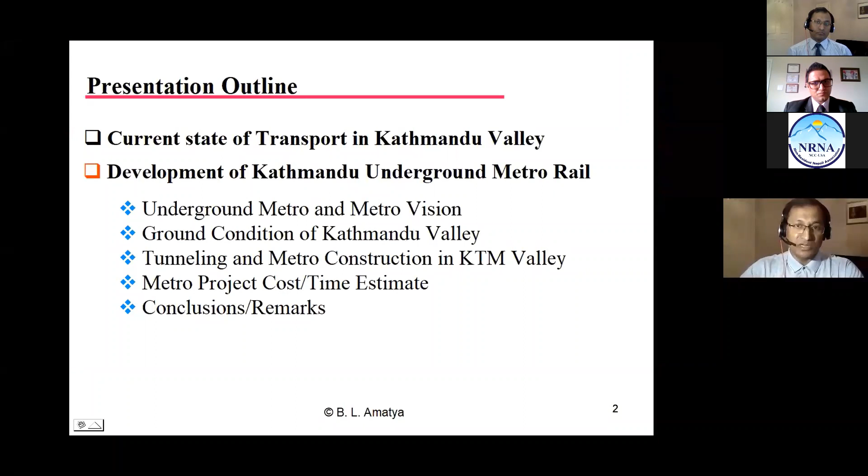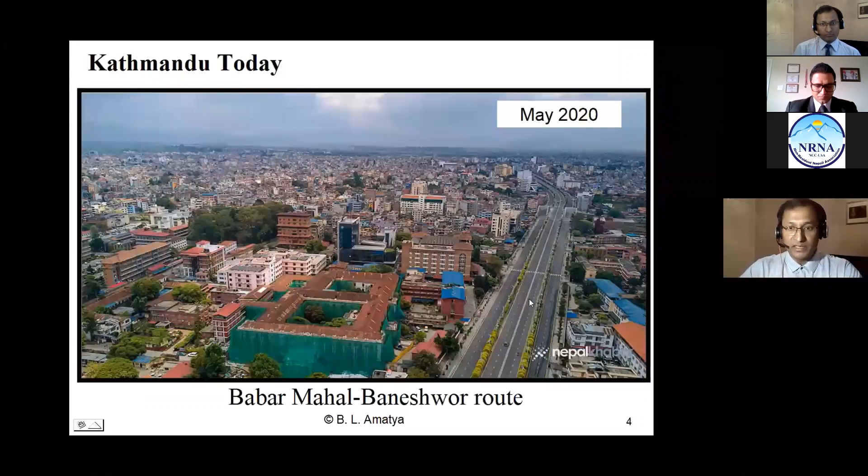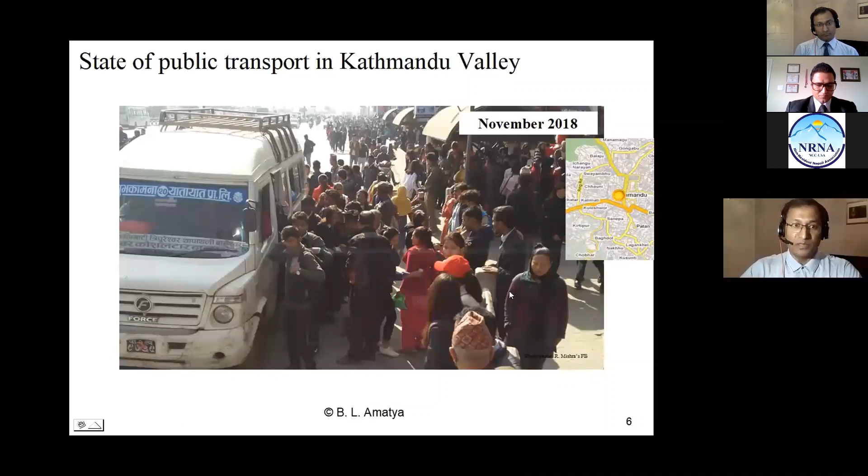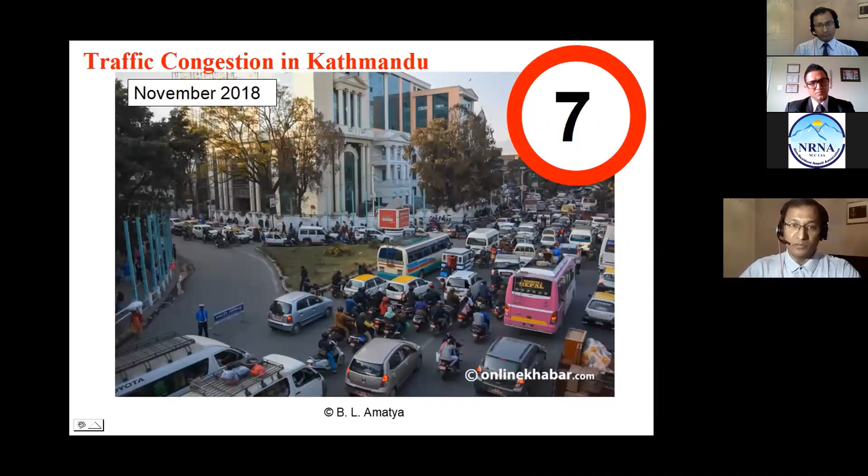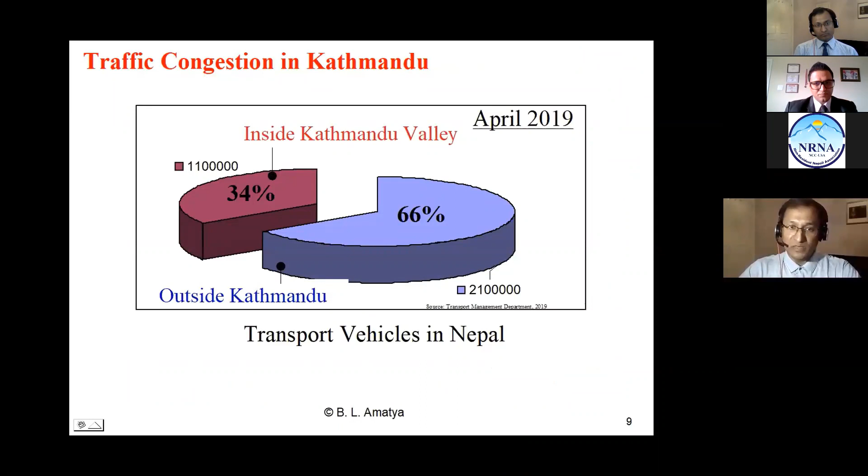See that hundreds of people are waiting for vehicles and one microbus or minibus is here. And if we see the city vehicles here, they're barely moving. In rush hour traffic, the speed of vehicles is barely 7 km/h in our city. And the motorcycles are everywhere. The data shows that 1/3 of the vehicles in Nepal are within Kathmandu Valley. So wherever you go in Kathmandu, it's a traffic jam.

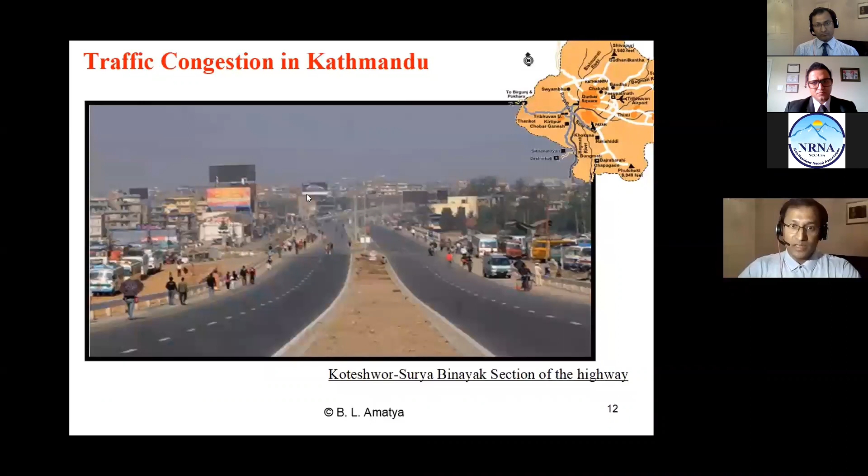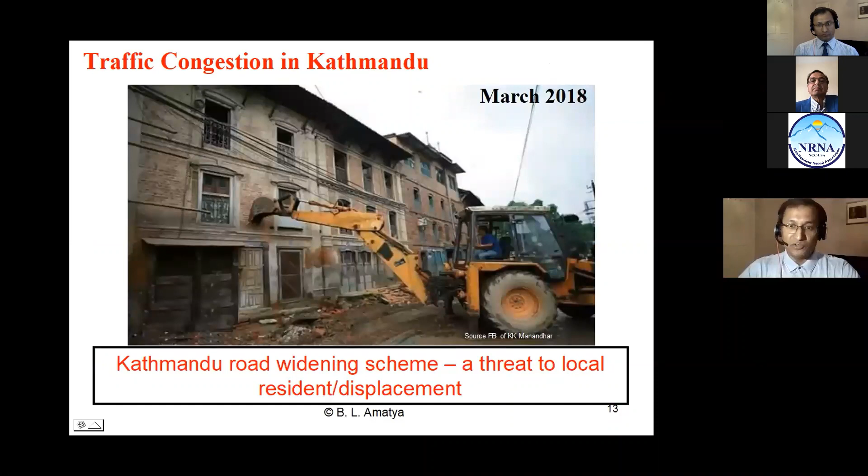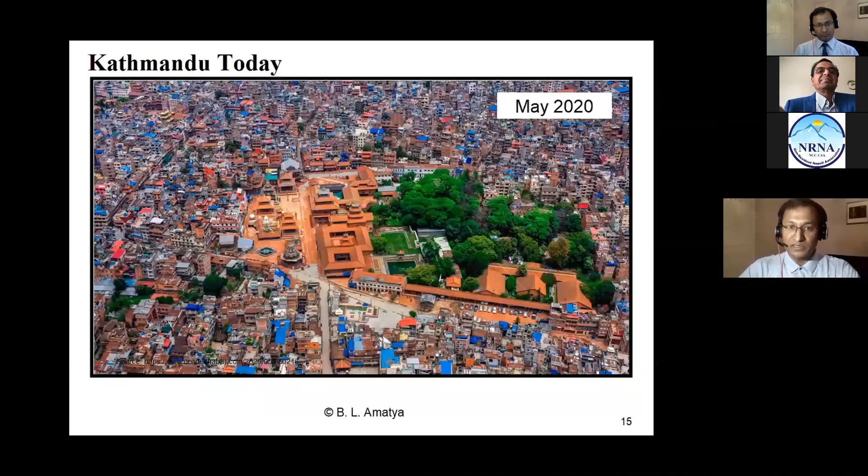So realizing that, authorities are widening the road here and there within the city corners as well. As a result, the road widening scheme has been a threat to local residents, and there's a protest for that. If we see the city grains in Kathmandu, heritage sites are here and there. You see Patan Durbar Square, embedded within the city grains. So the Kathmandu road widening scheme is a threat to national heritage.

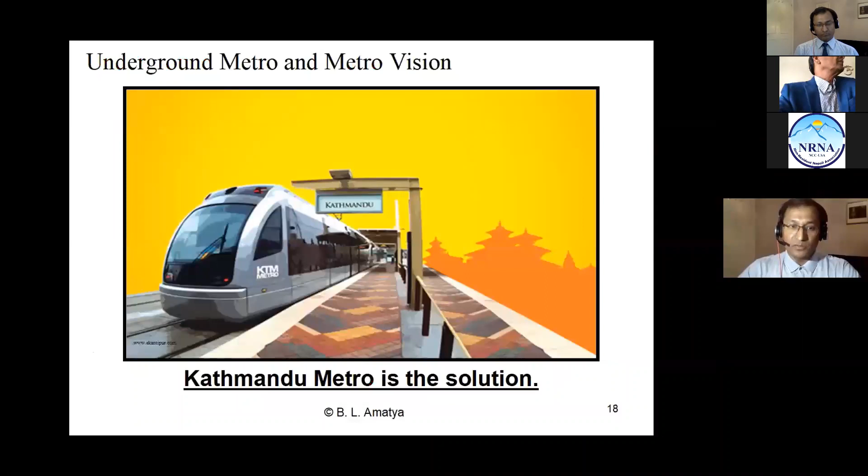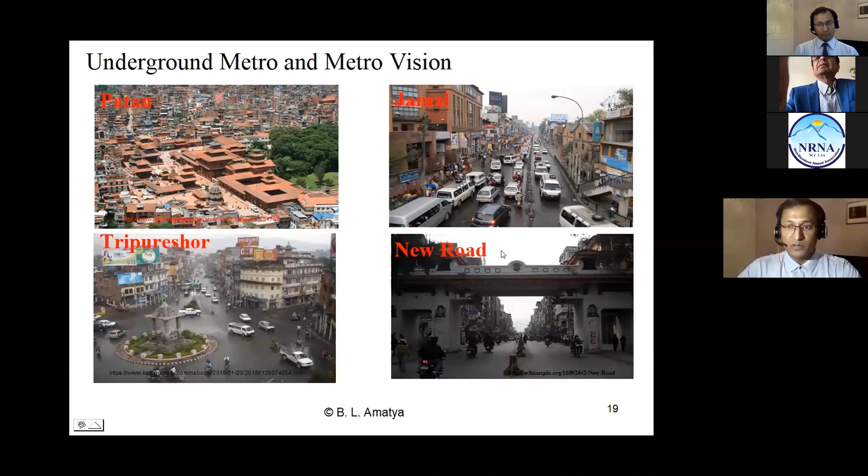So to solve this problem, Kathmandu Metro is the solution. And if we look in detail, as I said, the city grains are embedded with heritage, roads are very narrow, so there's barely space for building a SkyTrain. So to keep the city moving, we need to have an underground metro system in the core part of the city. So underground metro is the future of Kathmandu.

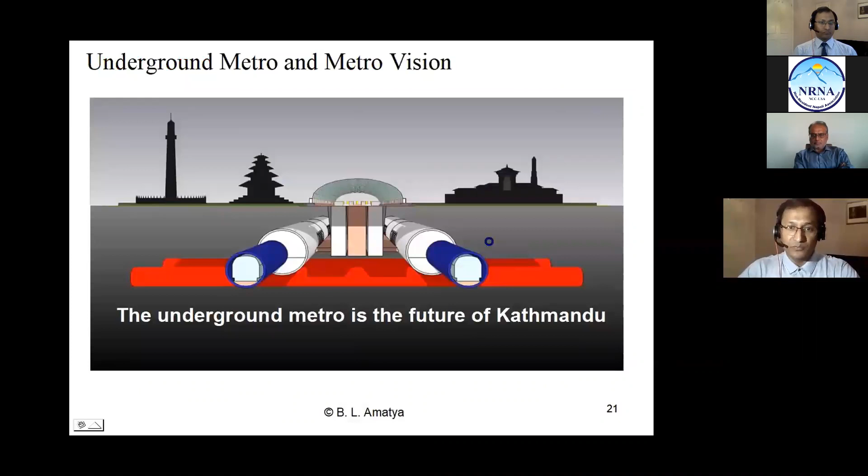While thinking about metro in Kathmandu, there are various modes of transport, for example, shuttle bus, BRT, cable metro, SkyTrain, monorail, or metro rail. I believe for the long term and for a capital city like Kathmandu, we need to have a sustainable solution that has capacity for now and the future. So we should have a metro with 25,000 to 60,000 carrying capacity per hour per direction.

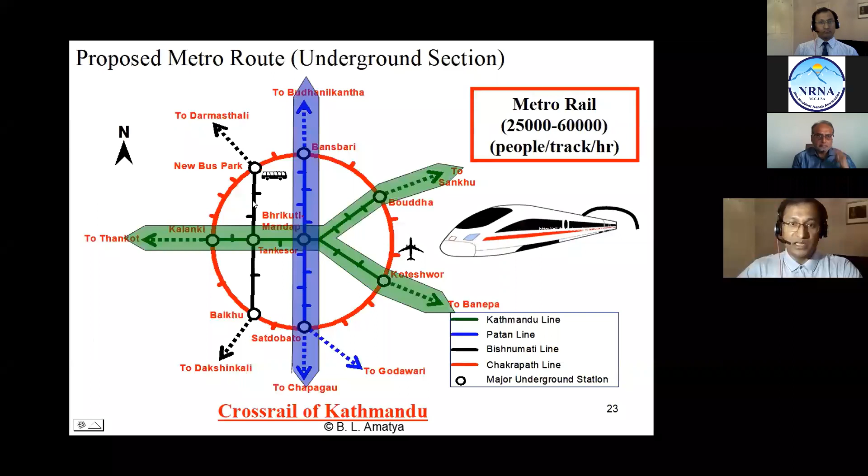So this is my proposed underground metro map for the Kathmandu core area. It basically contains 4 lines, and the blue and green are the cross-rail of Kathmandu to be prioritized. So this is the same map in Google Maps. Basically the 4 lines are there and the 9 major underground stations are there. While developing an underground metro system, underground stations are the most expensive or complicated part to build. So optimizing the number is the best way to economize the solution.

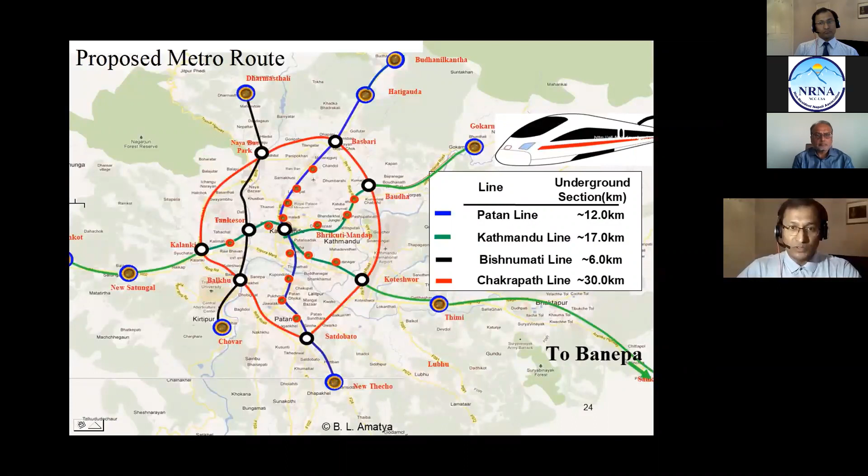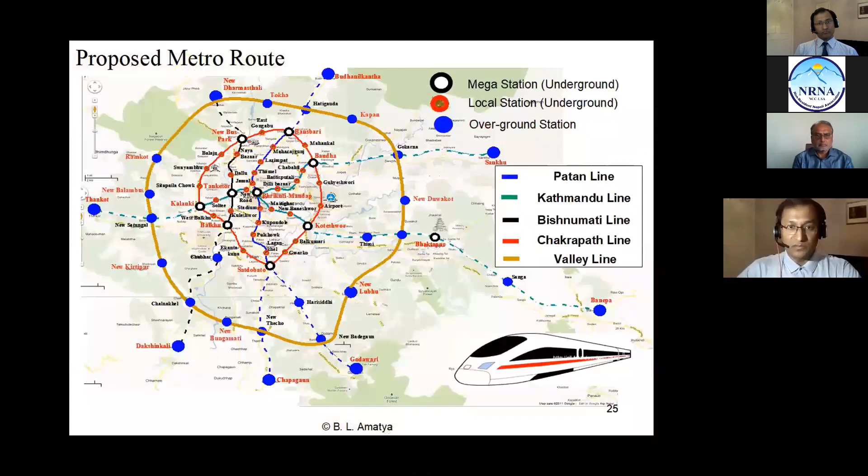So this is the broader map of the whole valley. There are 5 metro lines passing from east, west, north, and south of the valley. So I believe that we need to have a 20-year rail vision to build a metro system in Kathmandu. While thinking about a metro system in Kathmandu, we can build metro in 3 ways: building on ground, building elevated as SkyTrain, or building an underground system.

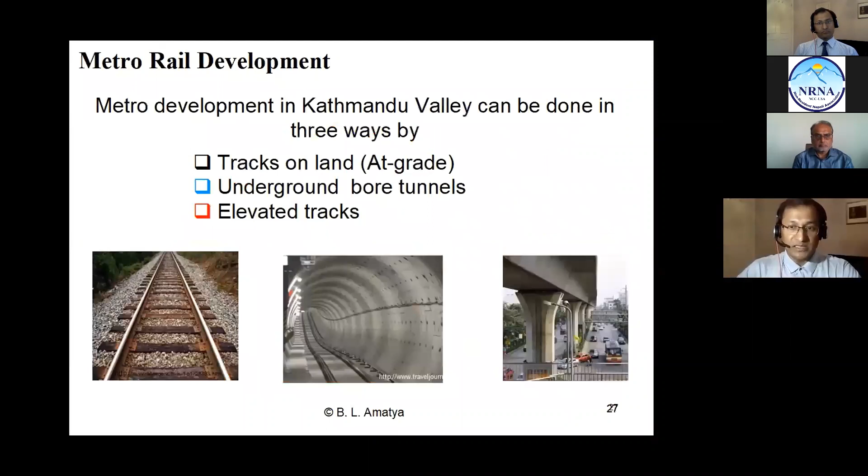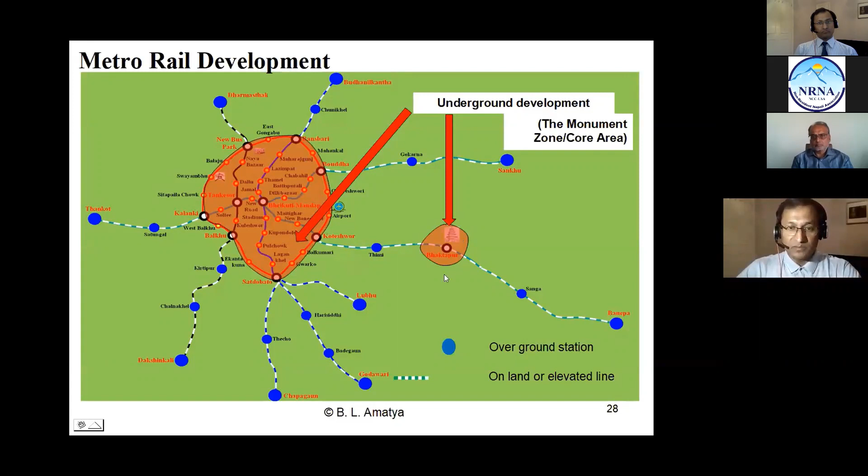So in the core part of the city, I say that we need to have an underground system, for example, in the core part of Kathmandu Valley within the ring road and some part of Bhaktapur. So this is an example of how metro can be built here. The outer radial parts outside the core could be elevated or on surface, but the inner part will be in tunnels like shown here.

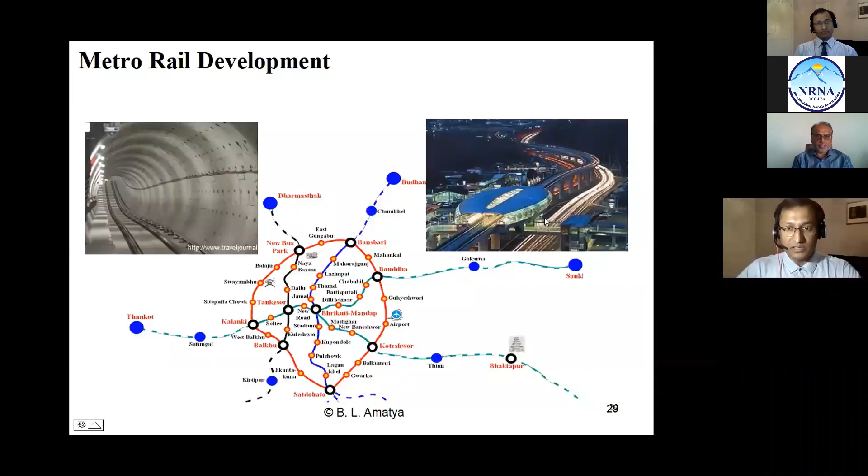So this movie clip shows the same thing. A train is coming from outside the city core. And as it moves to the center, it goes underground.

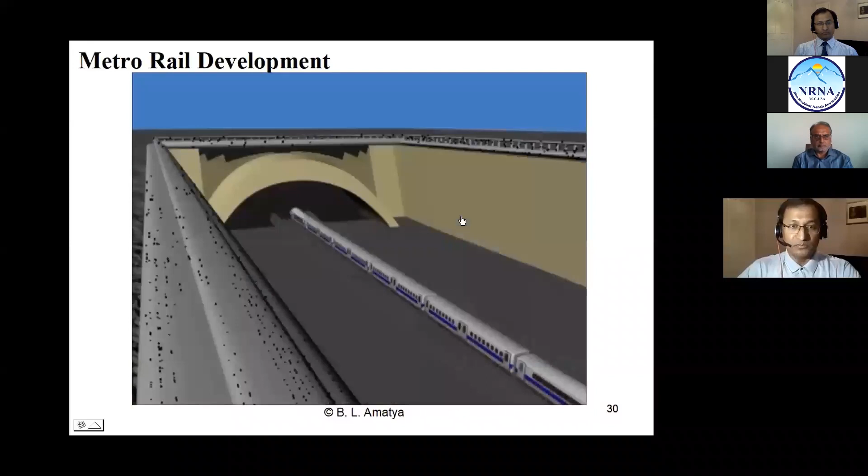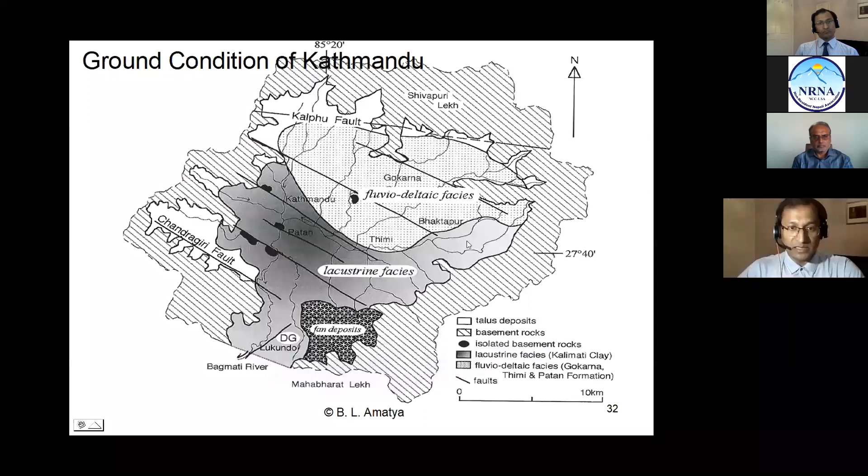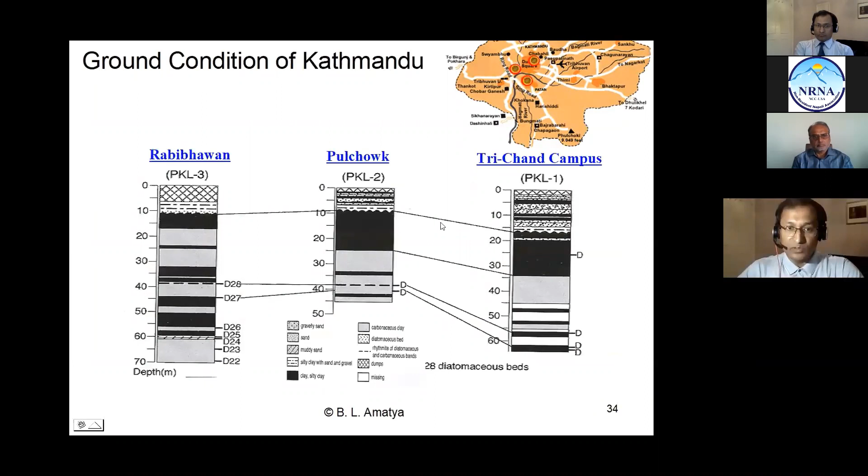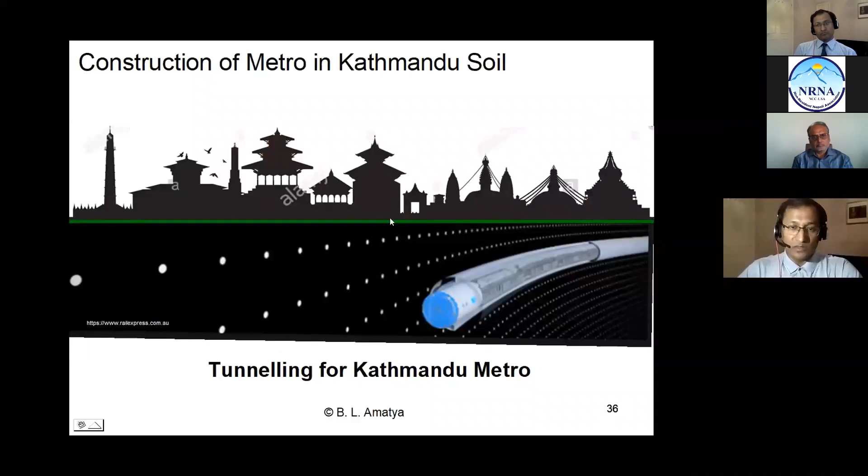In order for that, we carried out a study in 2018, building the Kathmandu Metro Promotion Group. In this group, there are 5 organizations: Warwick University of UK, Arcadis UK, ITECO Nepal, Multidisciplinary Nepal, and Tribhuvan University Institute of Engineering. So with 5 organizations' help, we managed to research in Warwick and did some findings about underground metro system development in Kathmandu.

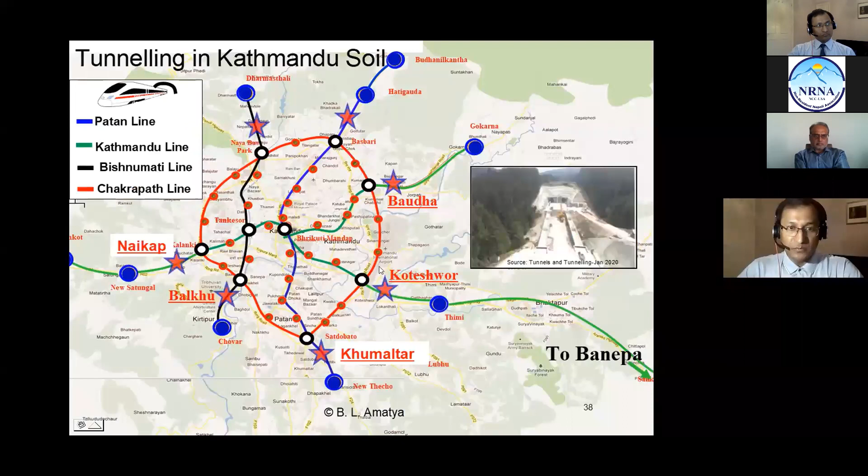So the basic idea here is to have tunnel launching portals at these star locations. For example, in the green line, we'll have a tunnel launching portal like this in Koteshwar and in Naikap, and then we start drilling tunnels. So this is the tunnel alignment of the Kathmandu Green Line. So basically the tunnels are underneath the ground around 18 to 25 meters below the surface.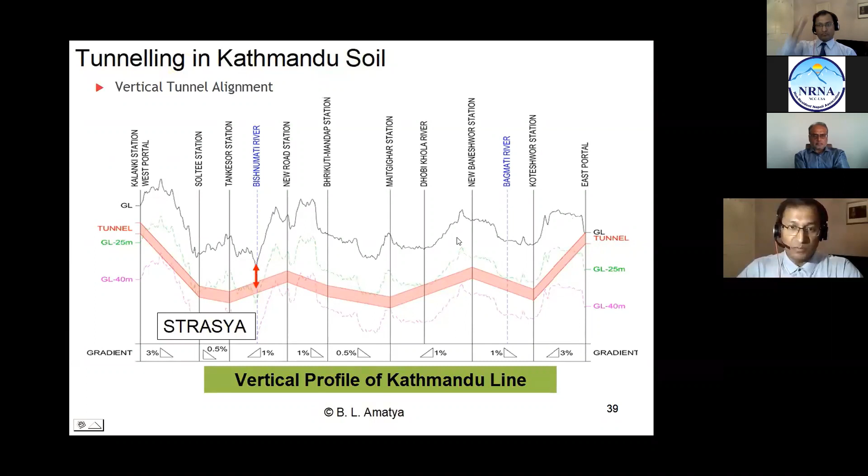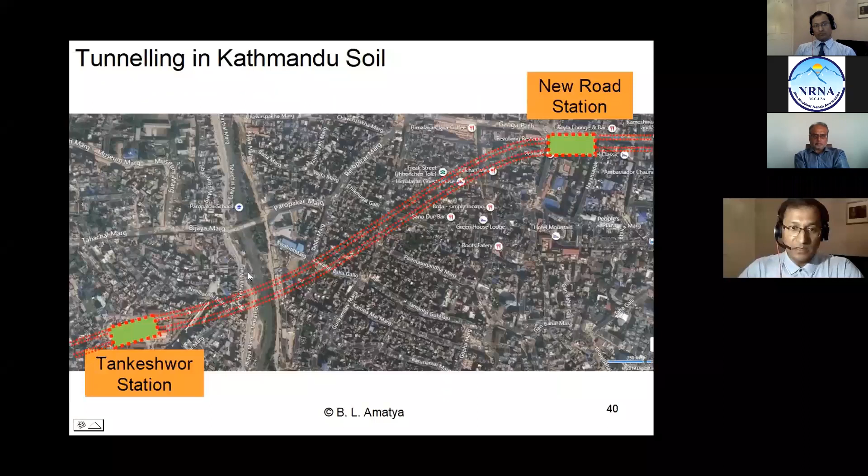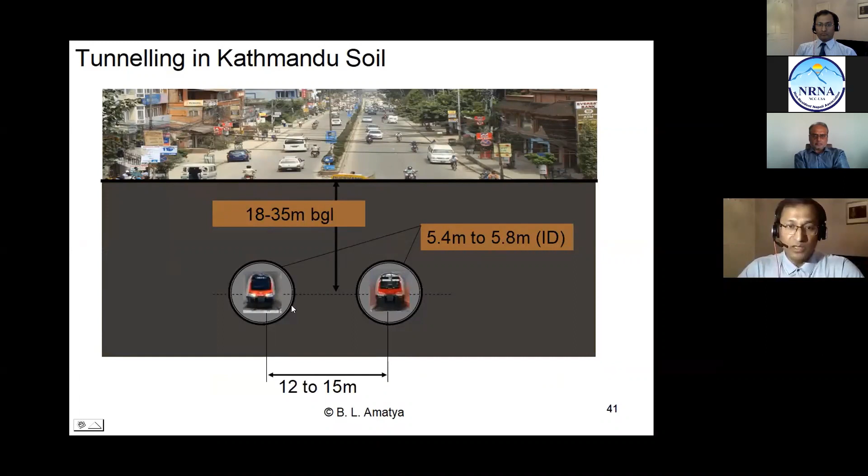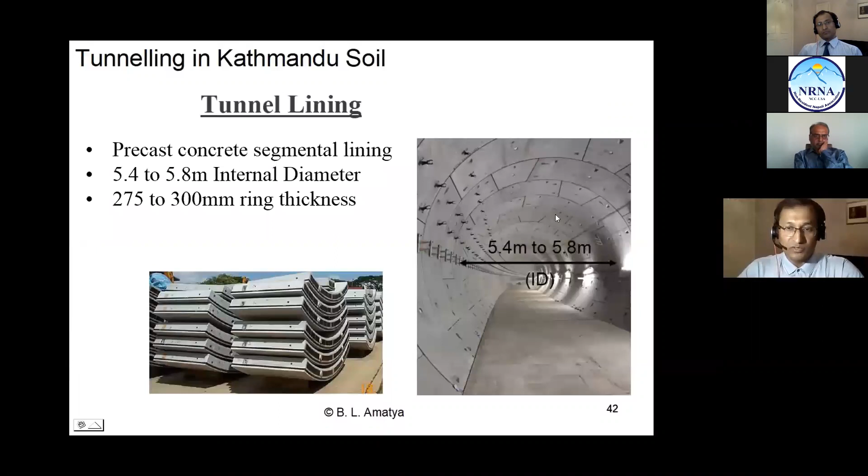So this shows that metro is buildable in Kathmandu, and for that we have tunnels at 18 to 35 meter depth, and 5.4 to 5.8 meter diameter tunnels seem more appropriate for Kathmandu conditions. That is a twin tunnel. And tunnels can be built using standard concrete linings. Study shows that, for such diameter, we need about 300 mm thick concrete slabs and 5 to 7 segments.

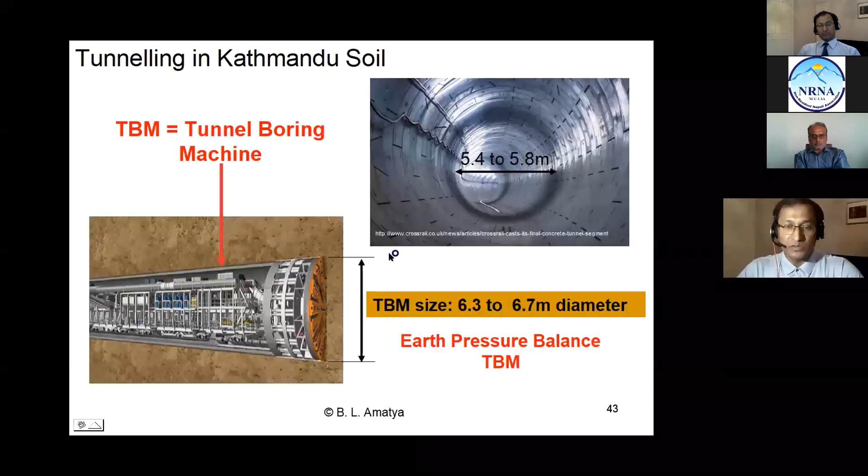And for that, we can buy a TBM machine, a tunnel boring machine of 6.3 to 6.7 m diameter. So Nepal also has experience of TBM now. In the Bheri Babai diversion project, a TBM was used to drill the tunnel.

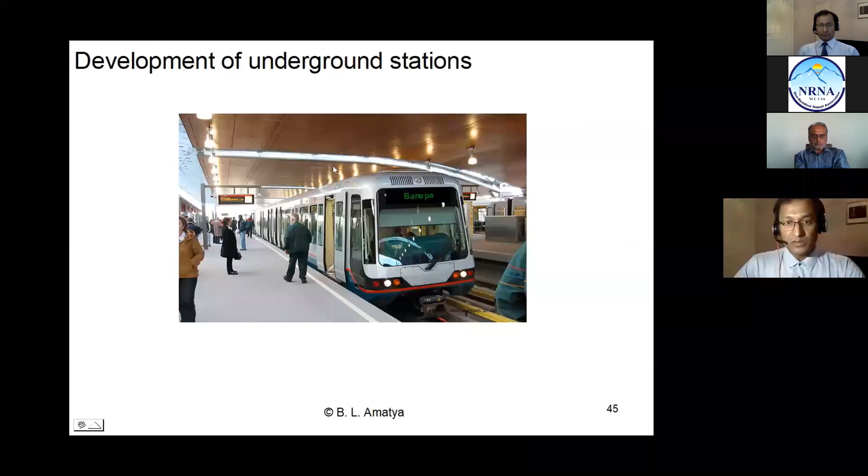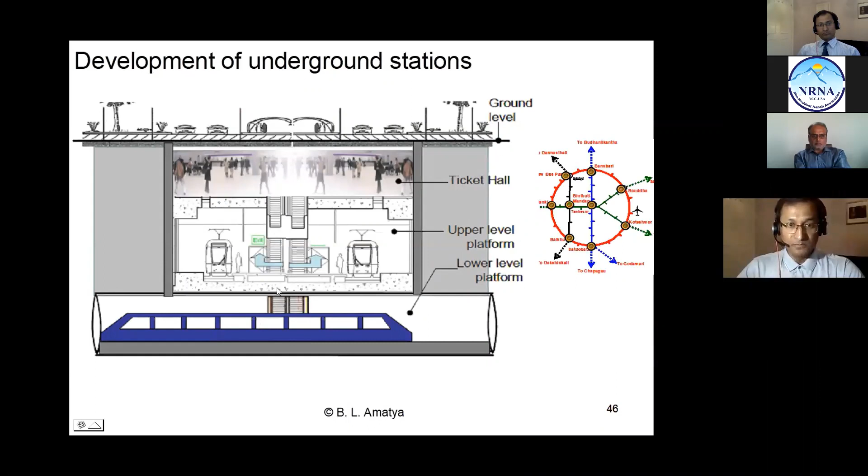Let's go to see some on development of underground stations. So as I mentioned before, I perceive 9 major underground stations in Kathmandu, and these major underground stations will be working like a junction and will be multi-story basement structures. So this is the underground metro station perceived at Bhrikuti Mandap as a Bhrikuti Mandap junction. This is the sketch prepared by Binod Sharma, a student, for his architecture project, and he has now completed his architecture degree.

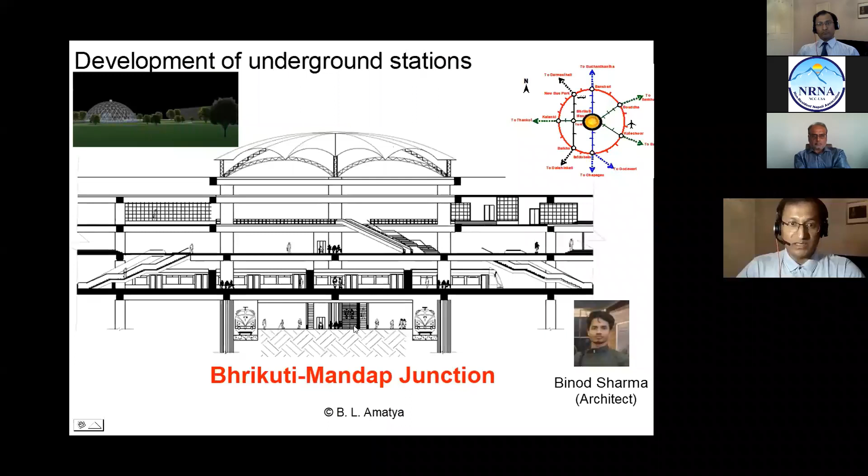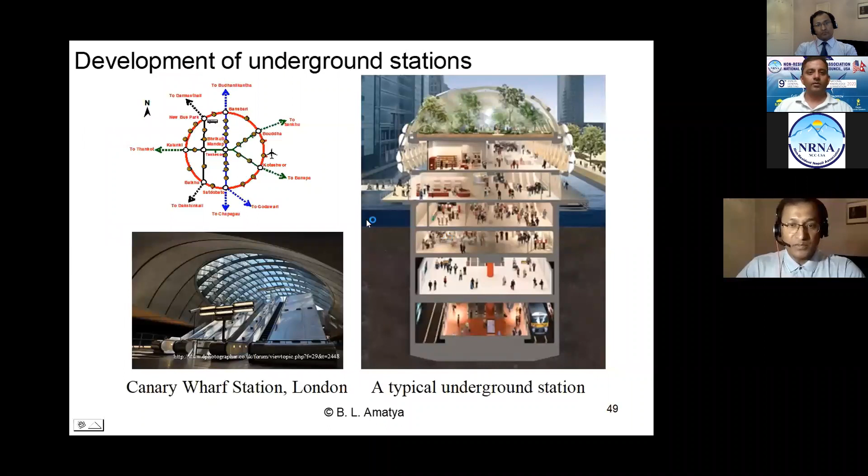Likewise, a local station can be built by enlarging the tunnels and connecting them. Or a local station can be built like this multi-story basement structure. I perceive an underground metro station in Baneshwor here in this yellow area in front of the International Convention Center. So this clip shows how the metro station can be built there. So this is the entrance of the station. As we move down, this is the middle part of the station, and as we move on we reach the platform area.

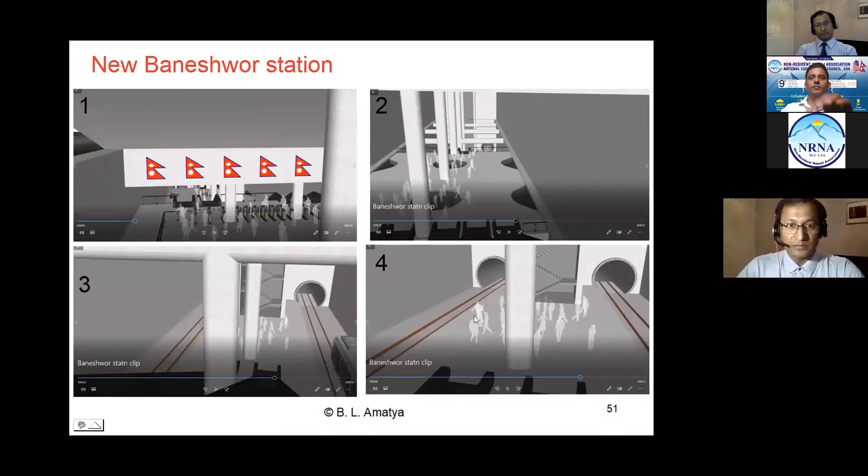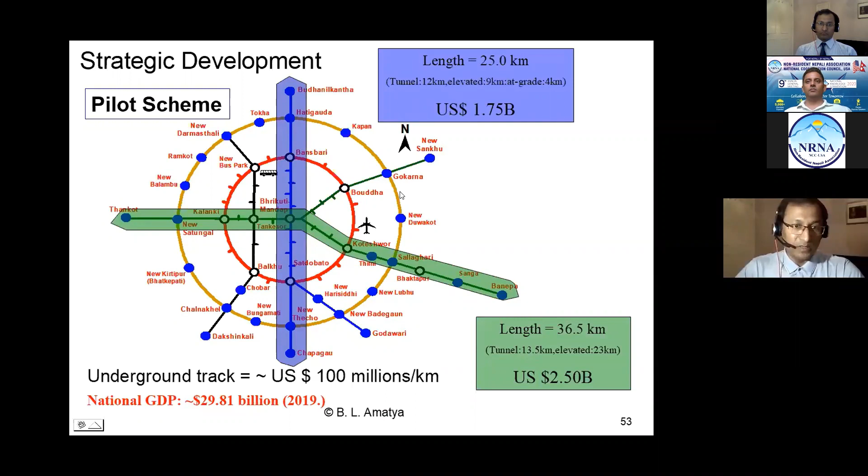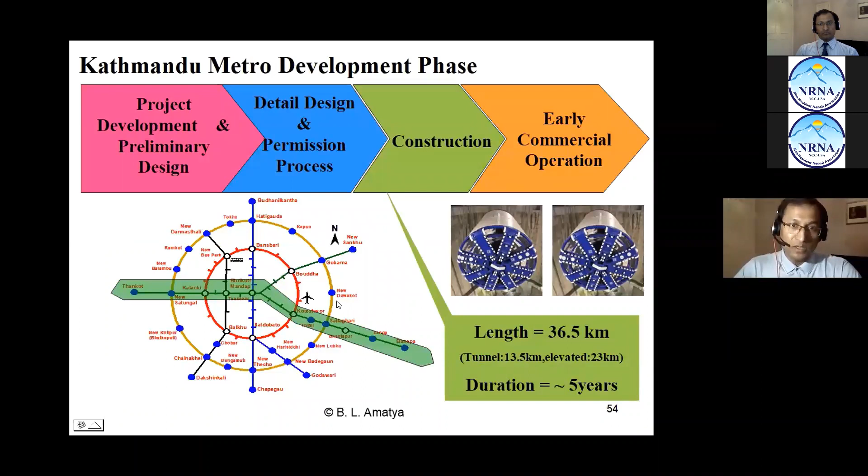And in terms of construction, the construction of the Kathmandu Line, 36 kilometers, will take about 5 years. Even if we work on a war scale, it will take about 5 years. So we are still in the advocacy phase and detailed design is still to be done. So even if we say we build metro now, it will be the next 7 to 8 years. So Kathmandu needs a master plan of rail development and we need to take action now.

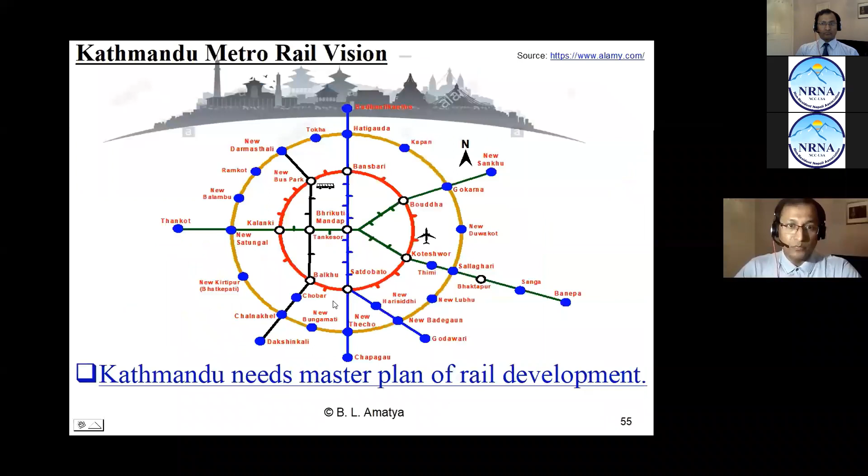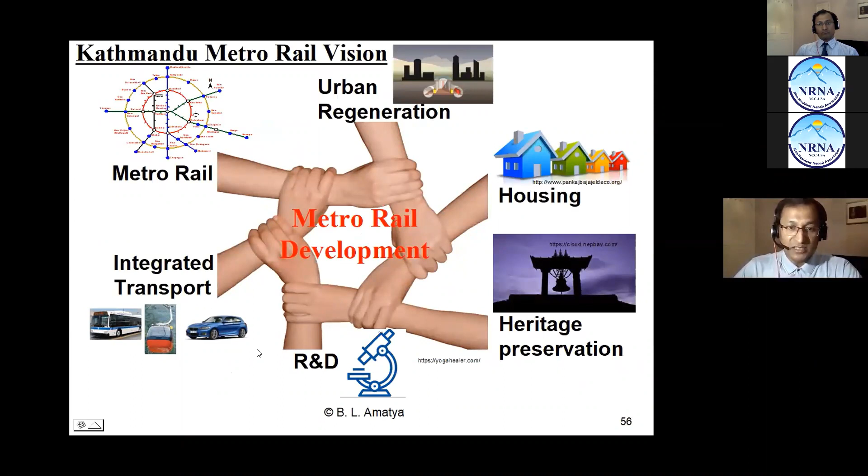And metro development should be integrated with urban regeneration projects, housing development projects, heritage preservation projects, and we need to integrate the metro system with other transport networks available in the city and research and development in this area. So we need to create a livable Kathmandu. With the current way of evolution, Kathmandu won't be a place where we can fulfill our potential. So underground metro is the future of Kathmandu.

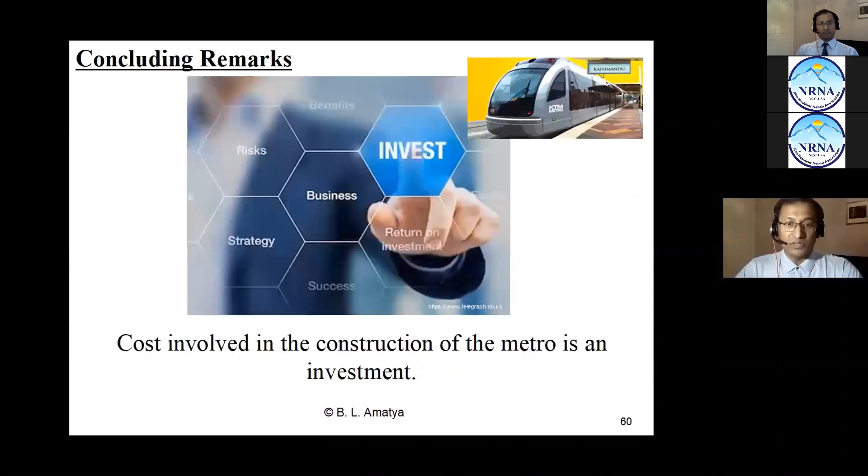Kathmandu Metro Rail is not just for us, but for our children and grandchildren. So the cost involved in construction of metro is an investment for our future. So we need to work together to bring a metro system to Kathmandu. So let's work together.